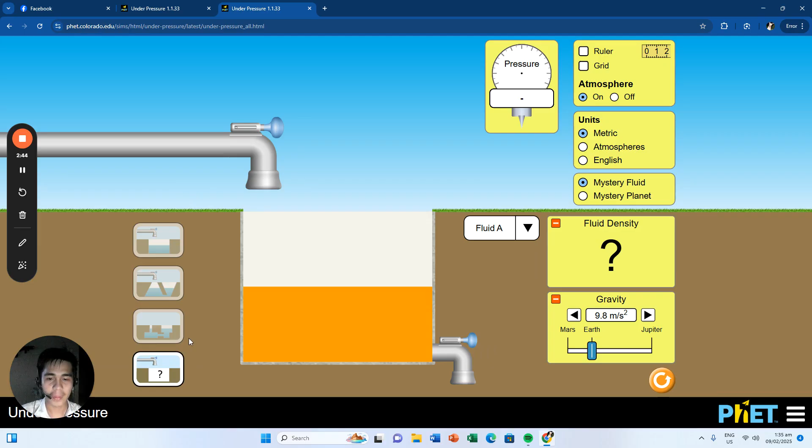Here we're gonna see different kinds of tanks. We have this, and this. So first, I'm gonna teach you the basics.

First, we can fill the water by pressing this. Look. We can also reduce the water by pressing this. Look, the water is reduced, so we're gonna add some water.

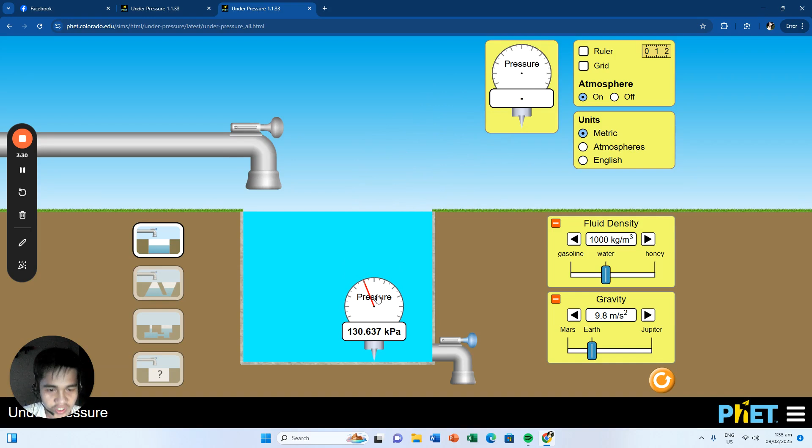So we're gonna find out what is the pressure below. We put this below, and the pressure is 130.637 kilopascals. And if we go higher, the pressure will reduce. If we go lower, the pressure will increase.